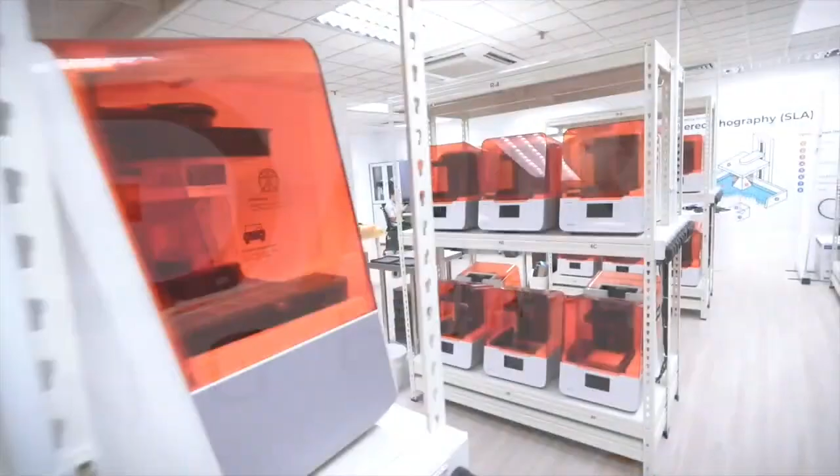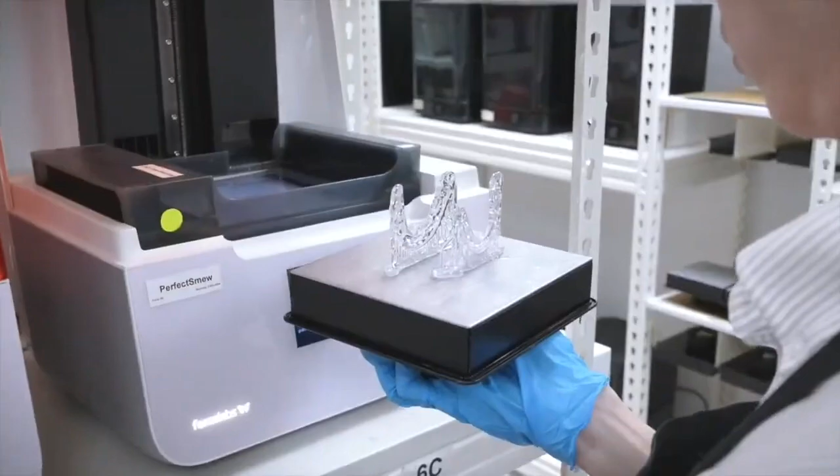In a world where one size rarely fits all, personalized healthcare is not just an option, it's a necessity. At Madarium, we shape the future of healthcare by integrating advanced 3D printing into the solutions we provide. Our technologies empower professionals to offer faster, more accurate treatments, ensuring every solution fits the unique needs of each patient.

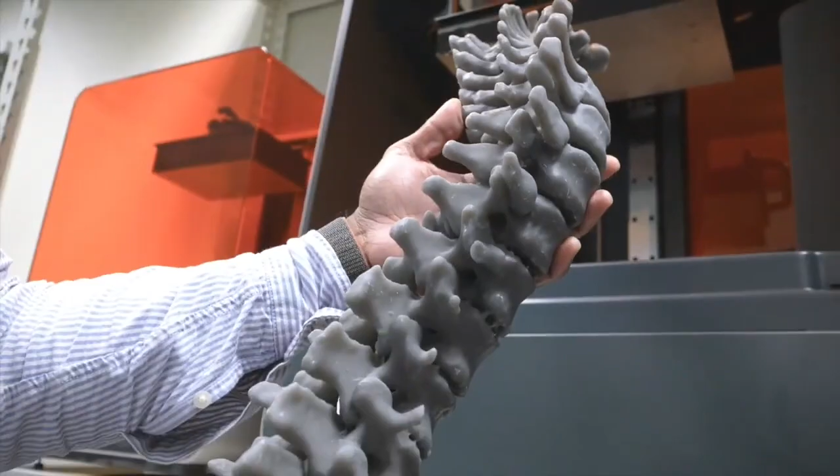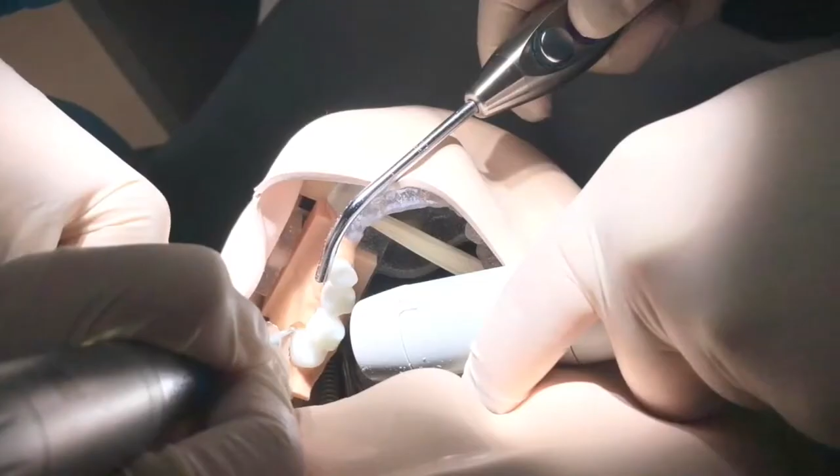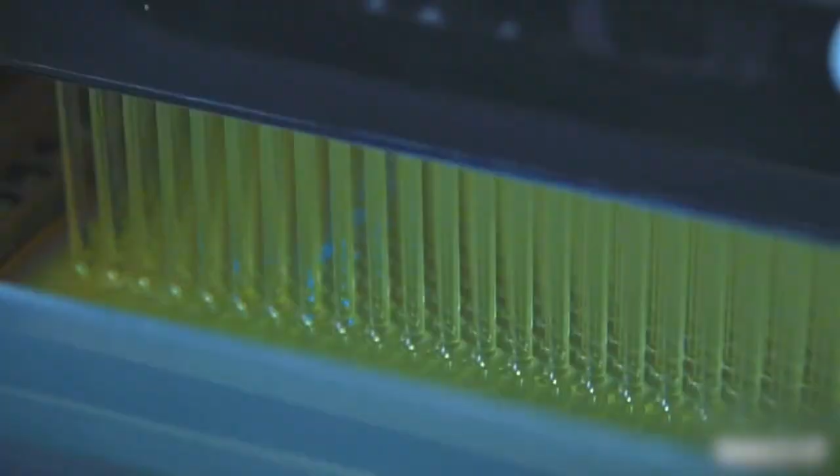We address the unique challenges of the healthcare industry by providing expertise and solutions in customized anatomical models and cutting guides, production of key medical supplies, and enhanced training for healthcare professionals. During the COVID pandemic, we worked with partners and medical practitioners to design, clinically trial, and produce millions of COVID-19 swabs to reduce potential shortages created by the pandemic.

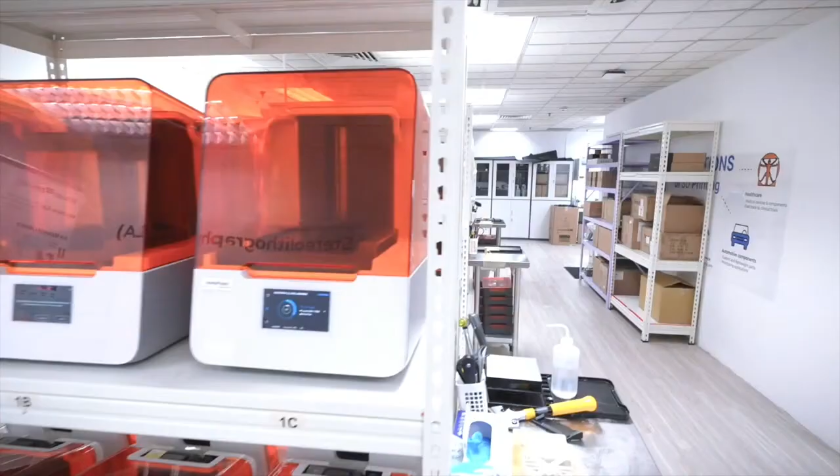Quality is at the heart of everything we do. To ensure we meet the highest requirements of the medical industry, our manufacturing is now certified to the internationally recognized ISO 13485 standard.

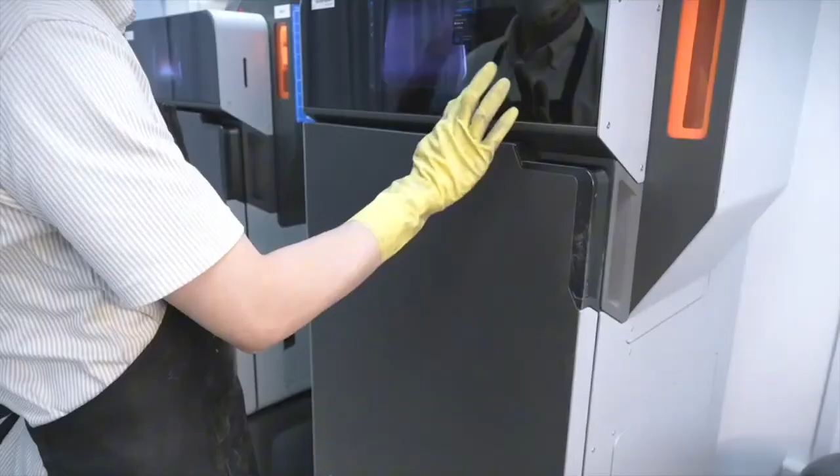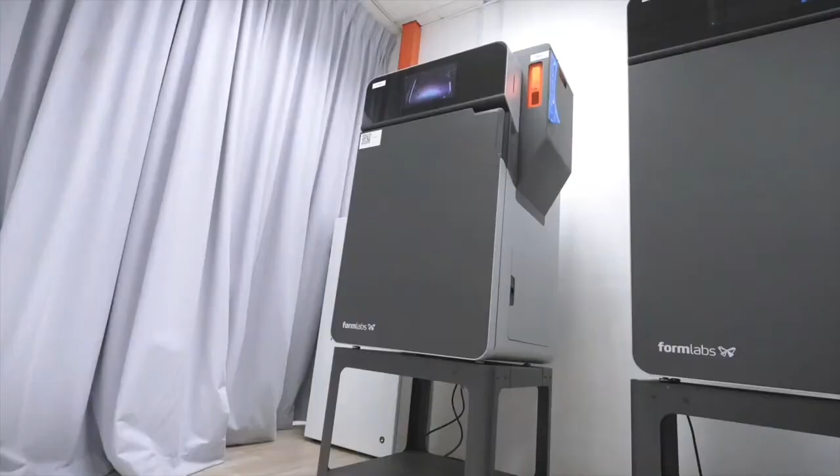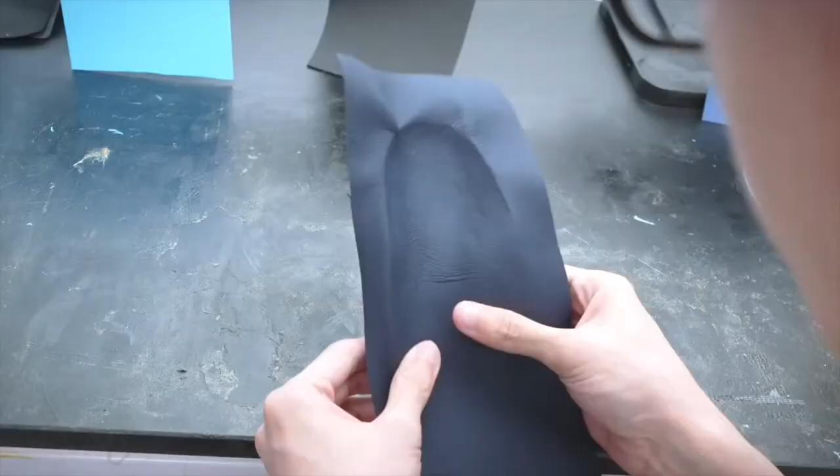This ensures the products we produce are safe, reliable, are of the highest quality, and can be trusted to provide the functionality needed. We have recently embarked on a new chapter to provide the same level of quality and commitment to the orthotics industry. Combining cutting-edge 3D printing technologies like SLS, SLA, and FDM with precise CNC milling, we are now delivering custom insoles from start to finish and working with podiatrists to bring solutions to improve patient care locally and regionally. At Madarium, making a positive impact on people's lives is at the heart of what we do.

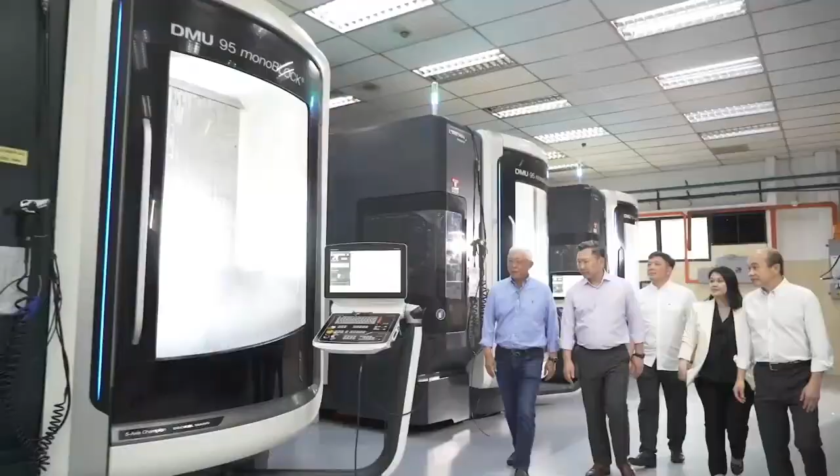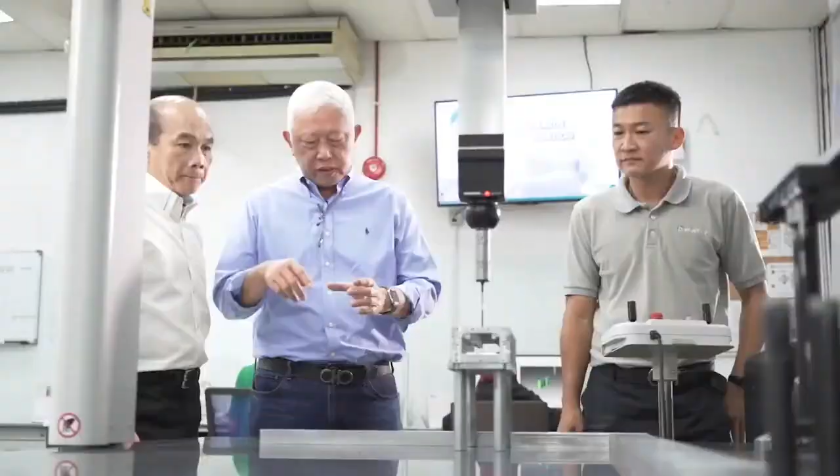We are delighted to sign a Memorandum of Understanding between NAMIC and IngTech. As the national platform for additive manufacturing, NAMIC is excited to enter into a partnership with IngTech. This collaboration will create significant value as we work in partnership to establish an additive manufacturing technology center of excellence in Singapore. Our collaboration aims to develop and customize advanced additive manufacturing training courses, leveraging NAMIC's accredited service providers to ensure the highest quality of education and upskilling.

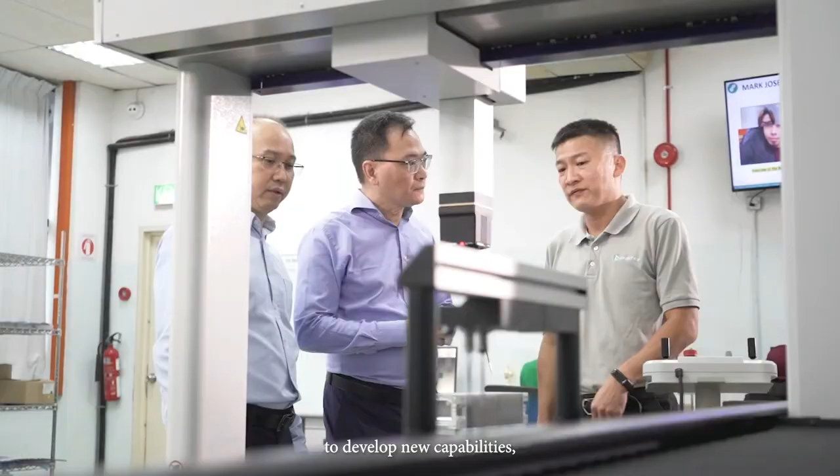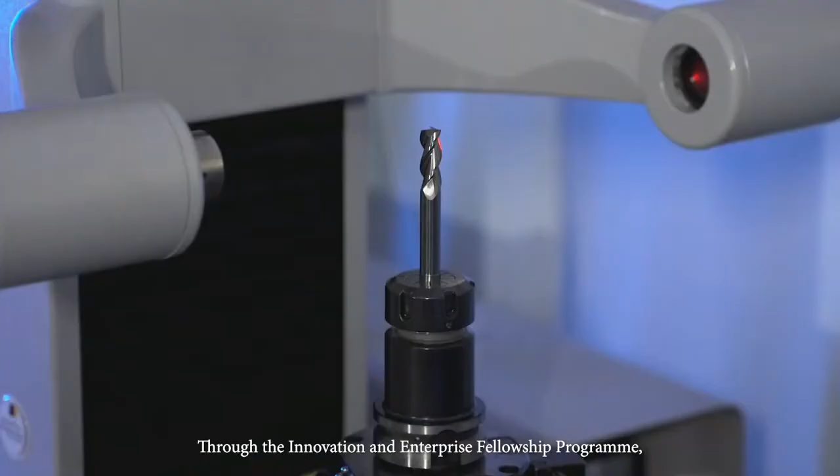We're committed to helping companies develop new capabilities, equip our professionals with industry-relevant skills, and position regional enterprises like IngTech to leverage Singapore's expertise in additive manufacturing. Through the Innovation and Enterprise Fellowship Programme, we will elevate IngTech's technical and operational expertise.

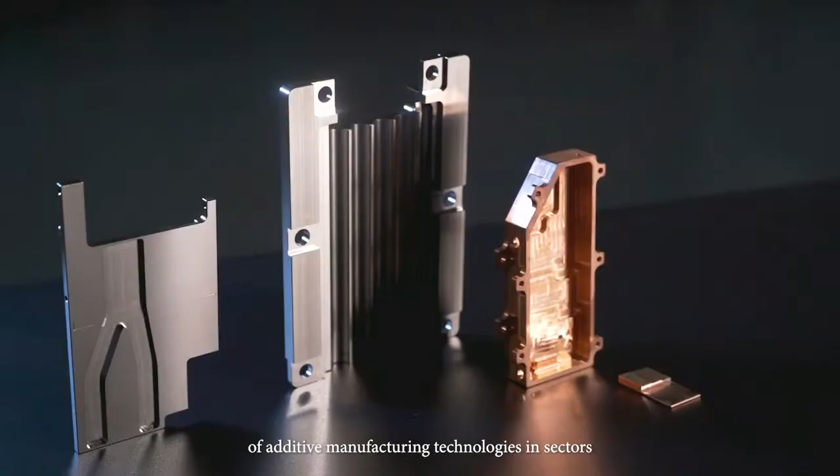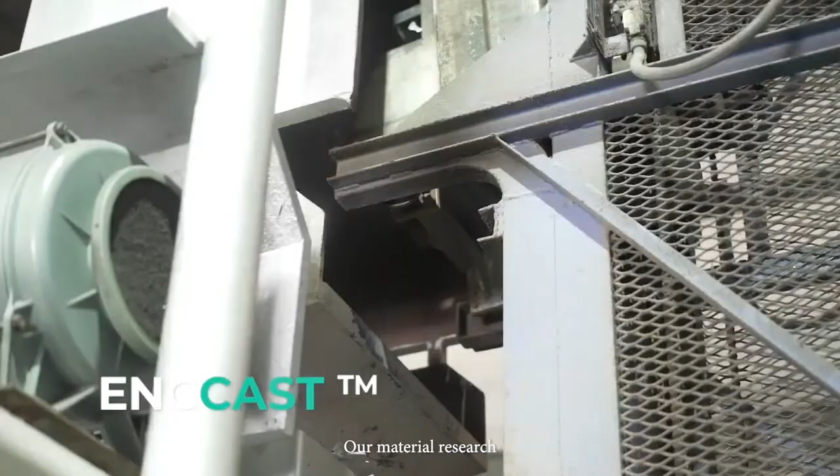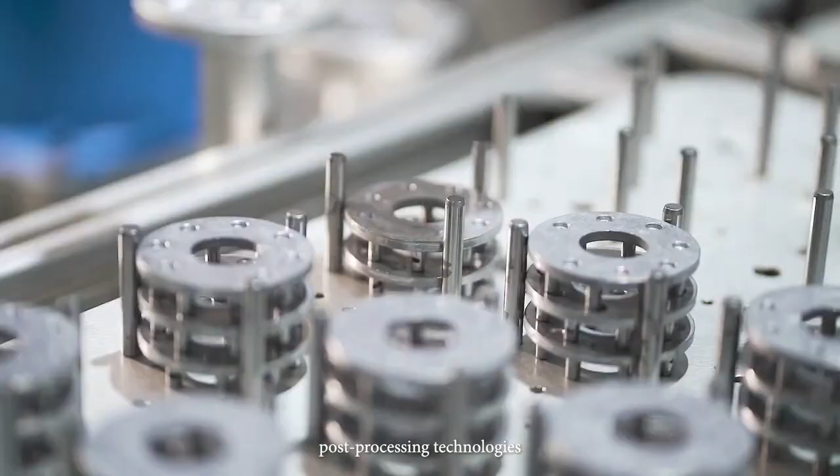We are committed to exploring future industry applications of additive manufacturing technologies in sectors such as automotive, semiconductor, HVAC, and life science equipment. Our material research will focus on optimizing and testing specialized aluminum alloys, while our efforts in process optimization and automation will enhance post-processing technologies, including high-precision machining, coating, and automated assembly.

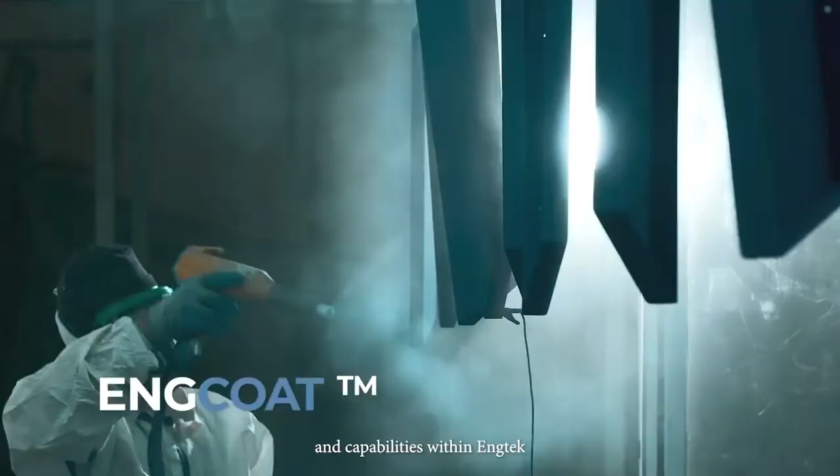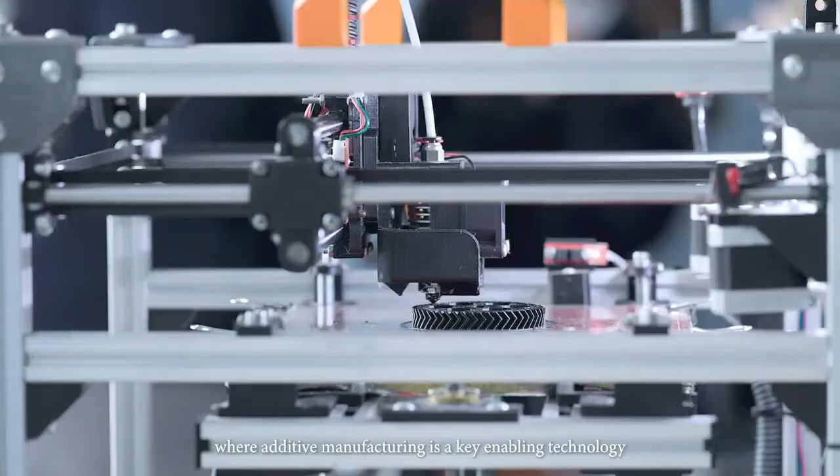We will deploy additive manufacturing machines and capabilities within Engtek to facilitate the commercialization of advanced manufacturing technology in the region. The new Center of Excellence will bring us closer to our vision of establishing Singapore as a deep tech innovation hub where additive manufacturing is a key enabling technology for sustainable manufacturing.

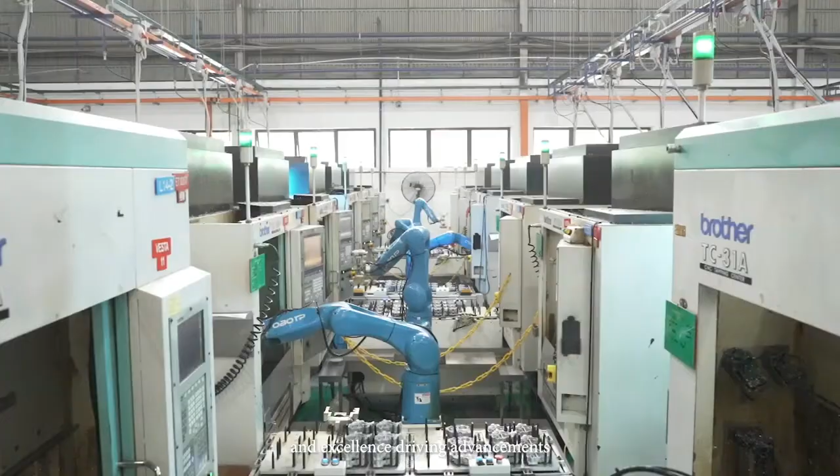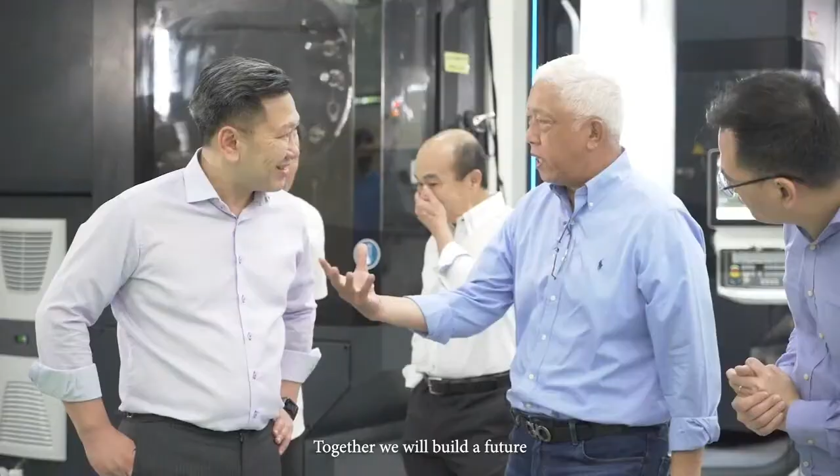We are confident that this center will serve as a beacon of innovation and excellence, driving advancements in additive manufacturing technology across the region. This partnership will drive innovation and support Engtek in expanding our market reach with additive manufacturing. Together, we will build a future where additive manufacturing technology transforms industries and propels us towards a new horizon of success.

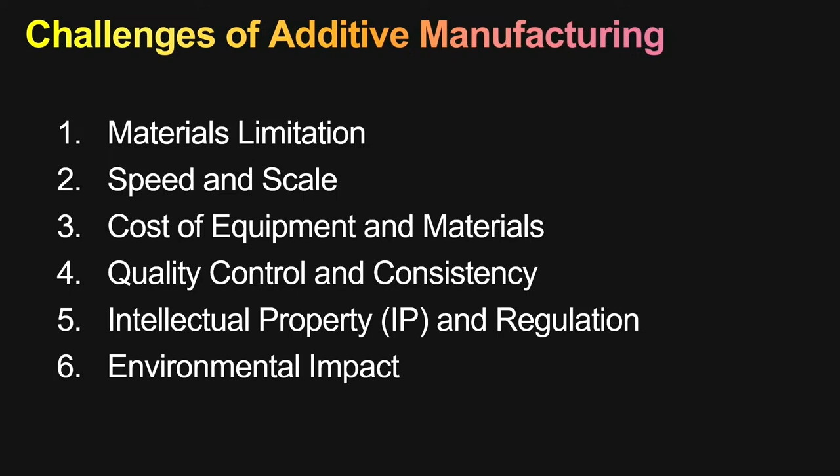So today, despite additive manufacturing being a door opener and making a lot of things possible, there are many limitations and challenges. This is a list of challenges that I felt would be good to share. Of course, this is a non-exhaustive list, and I'm happy to walk through each and every one of these limitations in the next 20 minutes or so.

Let's start with the low-hanging fruit: materials limitation. Plastics and metals are probably the most common materials for 3D printing. Much needs to be done in expanding the choice of materials. Traditional manufacturing can use a broader range of materials like ceramics, composites, and alloys, each with its own distinct properties.

I can tell you for sure, because I come from plastics manufacturing, so we make tools — injection molding tools. Within the tool itself, I can count at least 7 to 8 types of metal materials. Some conduct heat well, some are easy to machine and give the best finishing, and others require a certain level of structural integrity, and so on. But these materials are missing from the equation with respect to additive manufacturing, and this, in a way, limits the traditional manufacturer's choice of materials.

The performance and durability of 3D printed parts don't always match those of conventionally manufactured parts. That's easy to understand, because 3D printing, after all, is a layering process, so you can expect the final printed part to be anisotropic in terms of its physical and mechanical properties.

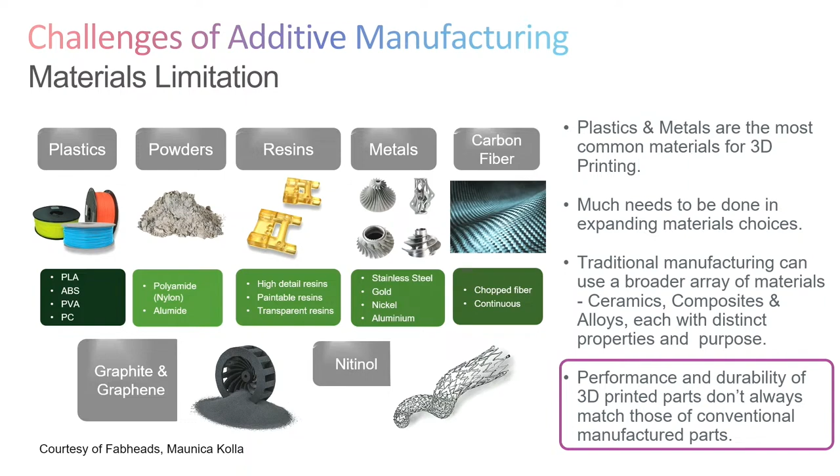The next and most important limitation is speed and scale. Production speed, as we all know, is somewhat limited for now. 3D printing is always viewed as excellent for prototyping and small batch production, but it struggles to compete with traditional manufacturing for large-scale production at a cost-effective price point.

Case in point, if you look at this animation, the traditional method of injection molding could literally use multi-cavity tools from 2 to 4, all the way up to even 32 cavities, versus 3D printing, which is often sequential, piece by piece. Therefore, it is difficult for 3D printing or additive manufacturing to catch up in pace with traditional manufacturing.

Integrating 3D printing into manufacturing production also requires print speed to be improved significantly. For example, if you have a production line where most processes use traditional manufacturing, and you want to introduce 3D printing into any one of these processes, it is quite challenging because you don't want that particular process to slow down the pace of the entire production line.

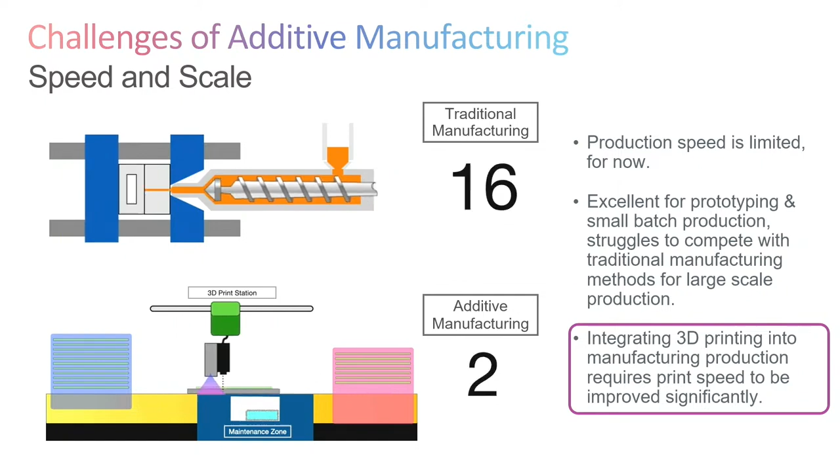Next on the list: cost of equipment and materials. High-end industrial-grade equipment remains prohibitively expensive, especially for small companies like us. Also, specialized materials required for high-performance applications can be costly, and this, in a way, limits the technology's ability and competitiveness with respect to conventional manufacturing.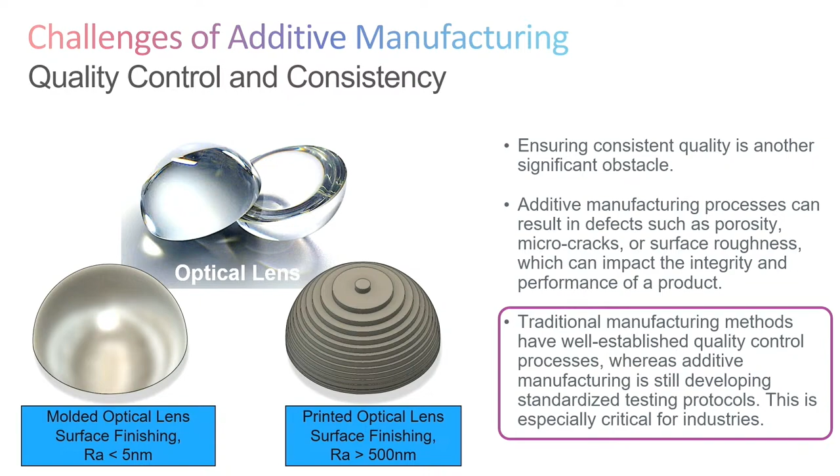Very important: intellectual property and regulation. There is a growing concern about intellectual property theft. Obviously, it is quite easy to copy files and share them. Digital files for 3D printing can be easily shared and modified, leading to unauthorized reproduction or alteration of products.

Regulatory frameworks must keep pace, and this hasn't happened quite yet. But this is very important, and for this sector to take off, this issue has to be resolved, especially for mission-critical sectors like healthcare, aviation, automotive, and so on.

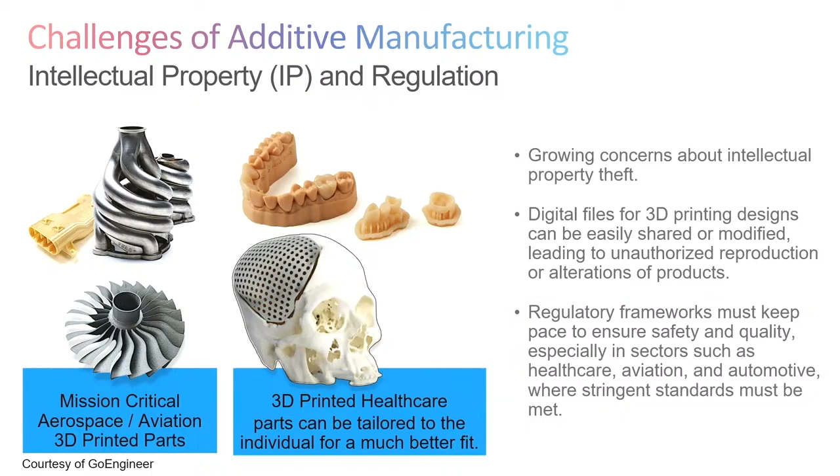Now, this is important enough for me to put on a slide. We all need to know that copyright law protects original work of authorship, and this includes 3D printed objects designed using CAD software. The creator of an original 3D model owns the copyright to the design by default, giving him or her the exclusive rights to reproduce, distribute, and create derivative works from their design. So registering an original design with the Copyright Office strengthens the ability for enforcement.

Now, unauthorized use can come in many ways—for example, selling 3D printed copies without permission, distributing the CAD files so others can print, and making adaptations of the original design to create derivative work. In a nutshell, existing copyright law does provide protection, but one must take proactive measures to assert rights over their intellectual property. So it's up to you to really protect your IPs.

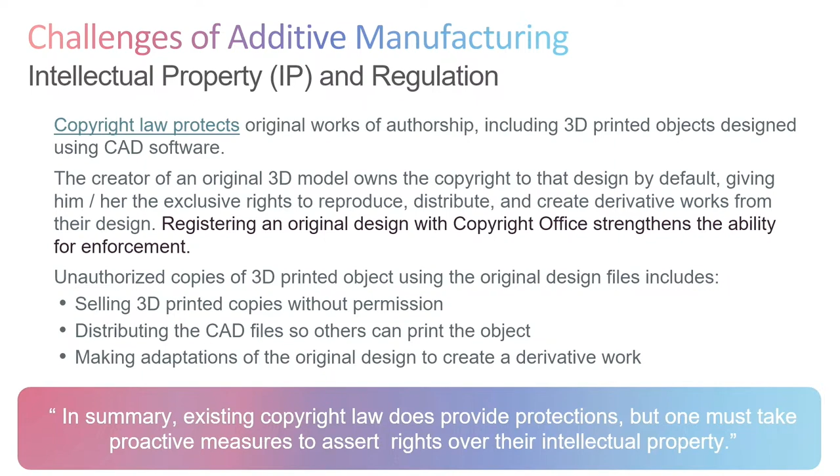What about environmental impact? Although 3D printing has the potential to reduce waste, as you heard from the minister himself, the energy consumption remains very high. And when I say energy consumption, one must understand it is not just the 3D printing process itself—very often the 3D printed product also needs post-processing, like milling, polishing, and so on, and this consumes energy.

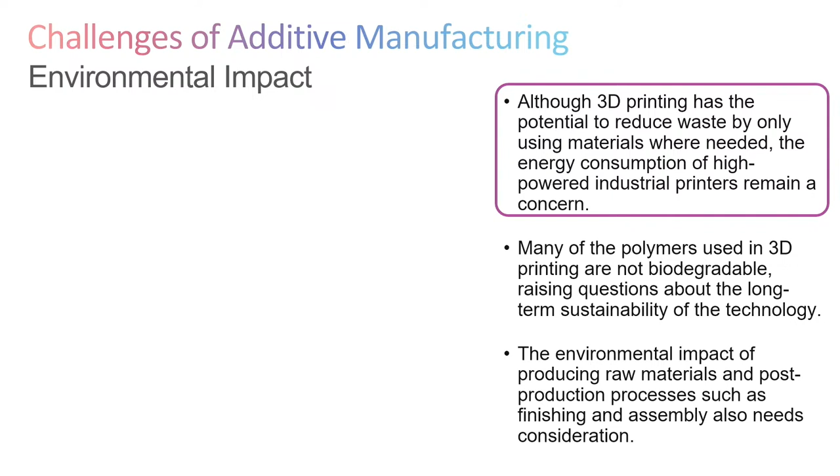Many of the polymers used in 3D printing are also not biodegradable and not reusable, raising questions about their long-term sustainability. In comparison, if you look at traditional methods like injection molding, most of the materials used are thermoplastics, so they can be recycled. For example, the runners can be crushed, defective products can be crushed, and then you can mix them with virgin materials and recycle them.

This is not so much the case with additive printing, because the materials used are mainly UV curable, and therefore they are thermosets—used once and thrown away. The environmental impact of producing raw materials and post-production processes such as finishing and assembly must really be taken into consideration. So it's not just about the printing process; it's also about the finishing processes leading to the final fit-for-use product.

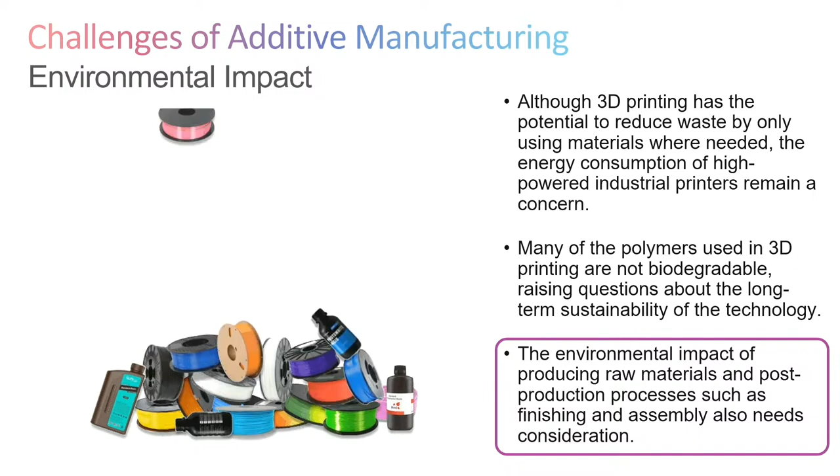All right, now that we have tackled the challenges, it's beginning to feel that 3D printing has a lot of barriers before adoption takes off. But not to be disheartened, I think this is really a very exciting technology that has been embraced and will continue to be embraced, with very exciting future trends in this sector worth a mention.

For example, advances in material science, improvement in print speed and scalability has taken off quite significantly. Customization is also very exciting, especially in the medical space, and on-demand manufacturing where everything can be done within the same location instead of worrying about logistics and supply chain. Using automation and integrating this with AI is also very exciting, because even if everything is printed differently or sequentially, AI and automated vision inspection can help make your product more consistent.

Sustainability and circular economy has advances in this area as well. And of course, very exciting is medical applications and bioprinting, I think this is probably one of the sectors that has really embraced 3D printing. And last but not least, the global supply chain disruption. So I'll take you through one by one.

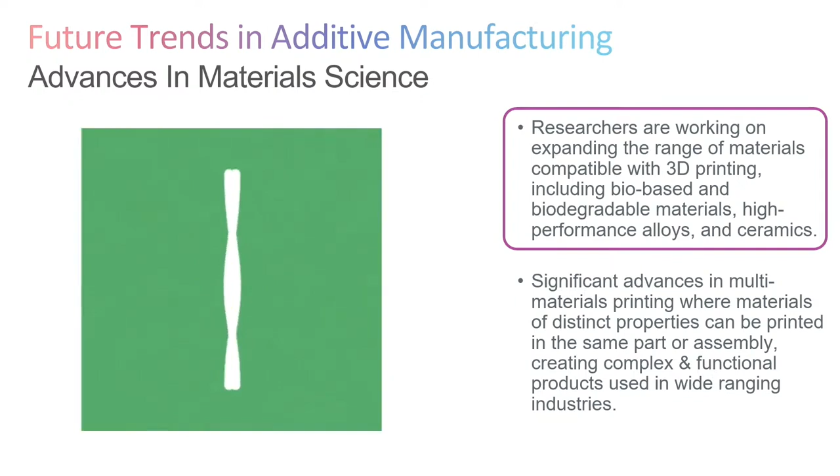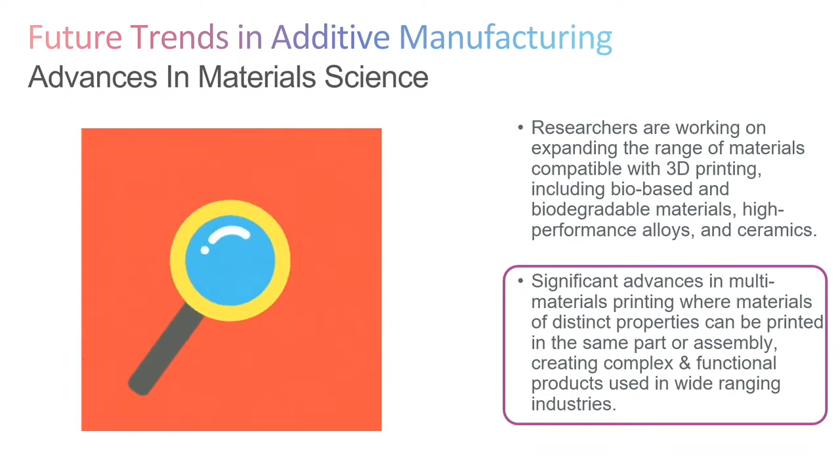Now, researchers are working on expanding the range of materials compatible with 3D printing, including bio-based, biodegradable resins, performance alloys, and so on. There are significant advances in multi-material printing, where materials of distinct properties can be printed in the same part or assembly, creating complex and functional products. A very good example of this is a process called two-photon polymerization.

But two-photon polymerization is not limited to just optics. You can also use it to print, for example, micro needles and stuff like that, which is very challenging for traditional manufacturing to take hold of and produce.

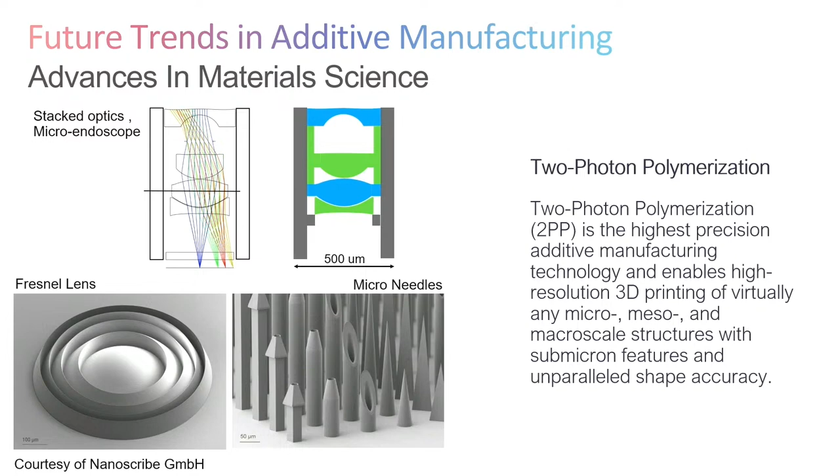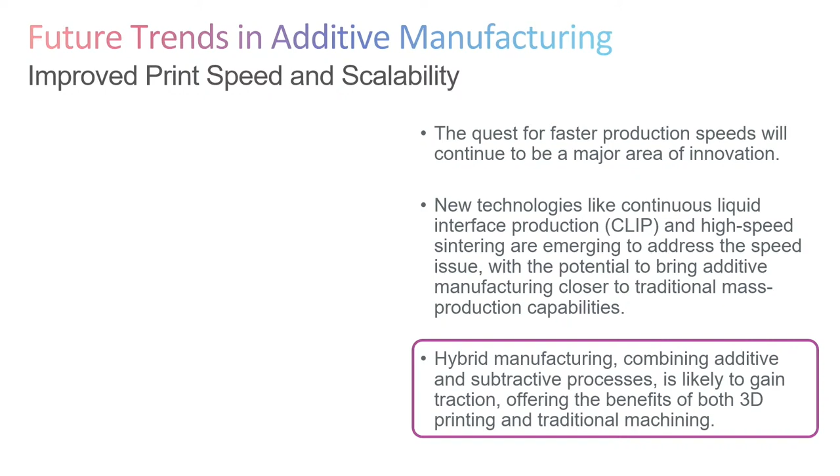None of this is so true as, for example, making an injection tool, and this is something we struggle with every day. In this tool, we have many different components, up to hundreds, using different kinds of materials and alloys. Most of these components are made using traditional processes like CNC milling, EDM, wire cut, lapping machines, and so on. But finally, you need to assemble them together and mount this on a machine for injection molding.

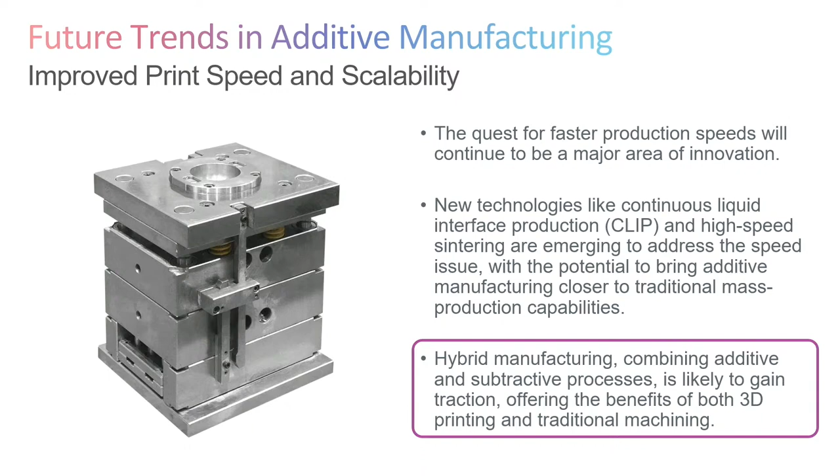But there are pockets of areas where 3D printing can really contribute. To make a tool like this involves making a cooling channel, which is important because you need to cool down the process using a coolant. The traditional method of making this kind of insert is to essentially drill horizontal holes across the metal inserts and plug the junctions where it matters most so that you can form a continuous loop. But this is not an ideal solution because the cooling is forced to move in a very structured way, without being very effective in terms of the cooling.

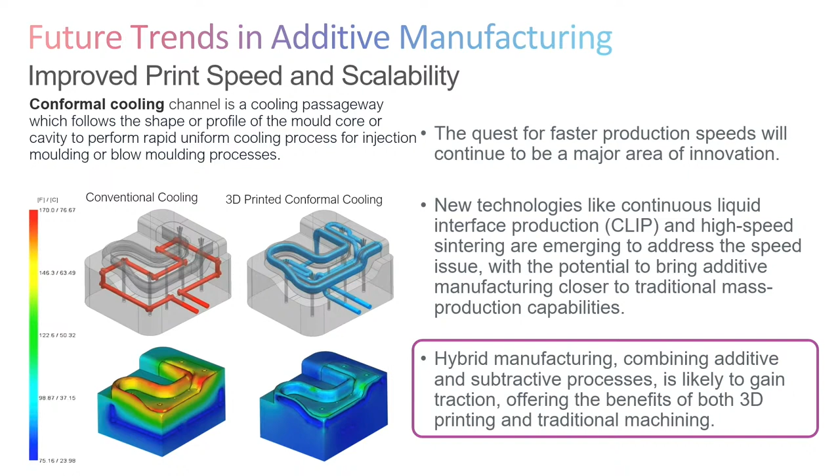Now, this can be replaced with what we call 3D printed conformal cooling, where the cooling channels are printed in such a way that it conforms to the geometry of the insert. This allows for more optimized cooling, as you can see from these thermograms. So this is one example of how hybrid manufacturing can combine additive and subtractive manufacturing to make sense of the manufacturing and offer a better solution to our customers.

Taking you down memory lane. This is the first 3D printed part produced by Mr. Chuck Hull in 1983, made using a prototype printer that he developed himself. You can see this on the right-hand side. This piece, measuring slightly more than an inch, took a few months to take shape.

You may laugh at this now, but today this same part can be produced within 10 minutes with better finishing and structural integrity. So this goes to show that 3D printing has really come a long way.

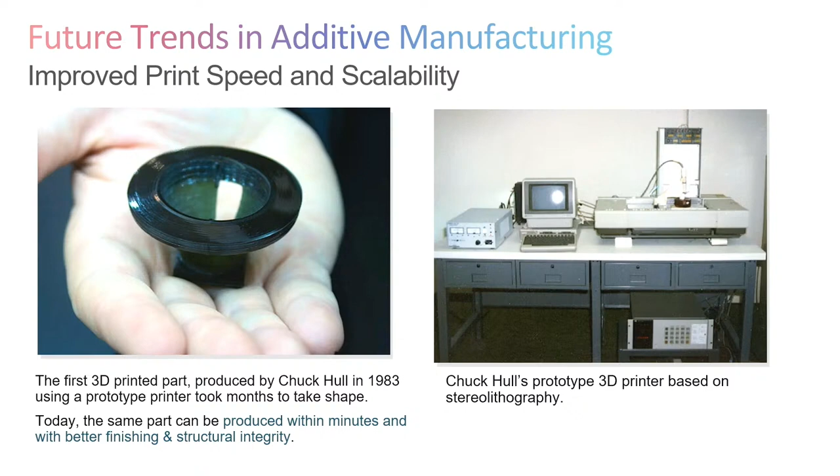Customizable and on-demand manufacturing. Additive manufacturing is well positioned to lead a shift towards greater customization, as you can see from the earlier presentation. This is none more obvious than in medical applications. Products can be tailored to specific needs of individuals or businesses, whether that's a medical implant, personalized consumer products, or spare parts made on demand.

Some examples here would be 3D printed orthotics, or even printed frames for your spectacles and eyeglasses. This is real because Hoya, the famous Japanese optics company, has actually launched a vending machine that prints precisely what is shown here, a frame suited to your face shape, your geometry, and so on. It showcases the customization of 3D printing and the advantages that it brings forth.

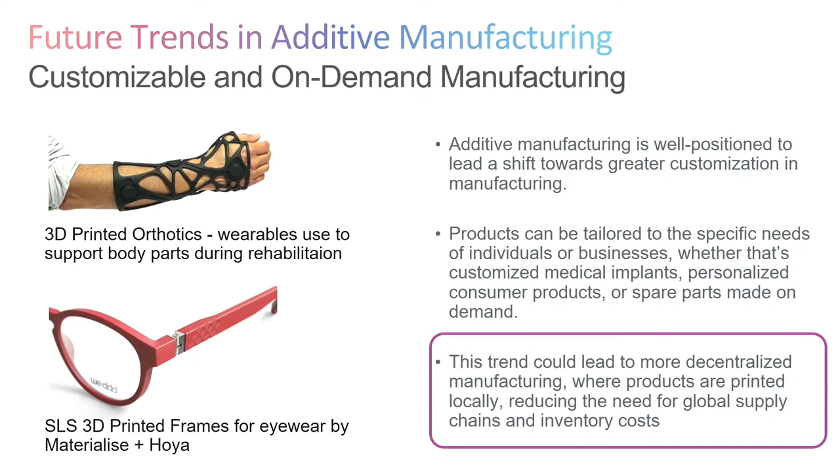This trend could also lead to decentralized manufacturing, where products are printed locally, reducing the need for global supply chain and, of course, inventory cost.

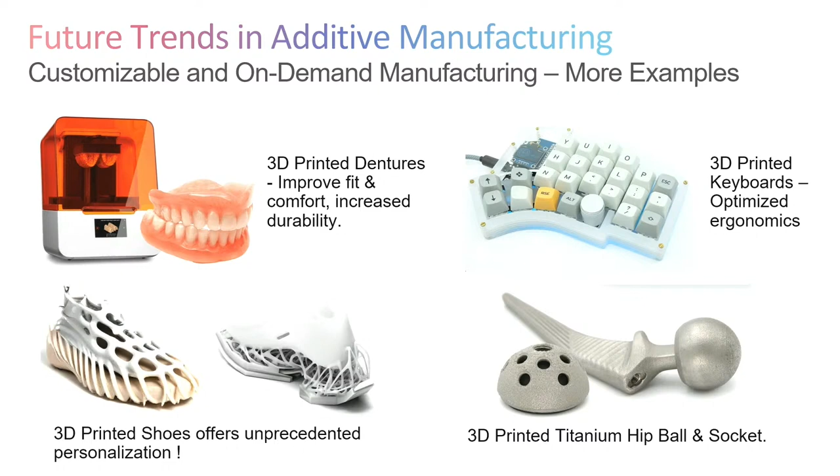Here are more examples of suitable products that would take advantage of 3D printing, from dentures to shoes to keyboards with optimized ergonomics, and 3D printed titanium hips and sockets.

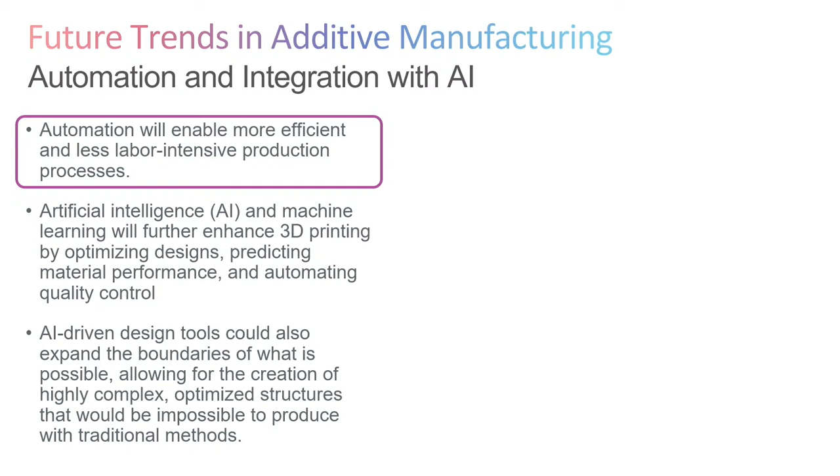Automation, also mentioned by the ministers, and how we can integrate AI into the equation. Automation will enable more efficient and less labor-intensive production. Artificial intelligence and machine learning will further enhance 3D printing by optimizing designs, predicting material performance, and automating quality control. I want to point you to this animation here.

This is an actual product or printer that we are developing. On the left-hand side is a magazine that's loaded with injection molded panels. What the printer does is print another layer of light blocking ink on one of the slopes.

There's a camera staring down at the printing. Because this is done with inkjet printing, nozzles get clogged from time to time, and when that happens, the part quality varies. So what the AI does here is look at a part and determine where the printing is not up to mark because some nozzles are clogged, and it alters the algorithm by switching to other nozzles that were not clogged.

By doing so, we could actually infuse AI into making the process more productive and the quality more consistent. I think this is an example of how we can use AI or machine learning, whichever way you want to call it, to help create processes which are more reliable.

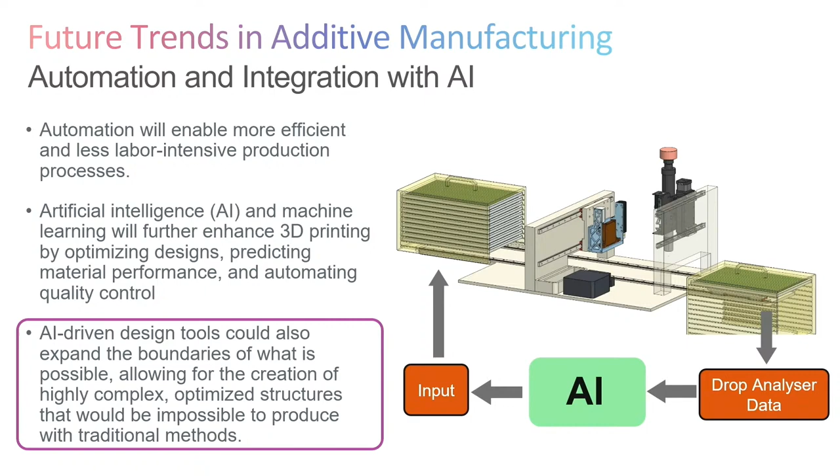So AI-driven design tools like this could expand the boundaries of what is possible, allowing for the creation of highly complex, optimized structures that would be impossible to produce with traditional methods. Let me show you the real product.

This is the panel that I spoke about, a prototype version. Unfortunately the video is not playing, but that's fine. What you can see here is a panel that we molded, but only on one side of the Fresnel—this is made by Fresnel. Only on one side of the Fresnel is printed with a dark ink that blocks the light. And why is this important?

Because this panel is used for holographic projection. At certain sites, on one side, you do not want the glare of the sun to be transferred to the eye, rendering the vision of the holograms more challenging. So this is exactly what an AI-enabled 3D printer would be able to achieve.

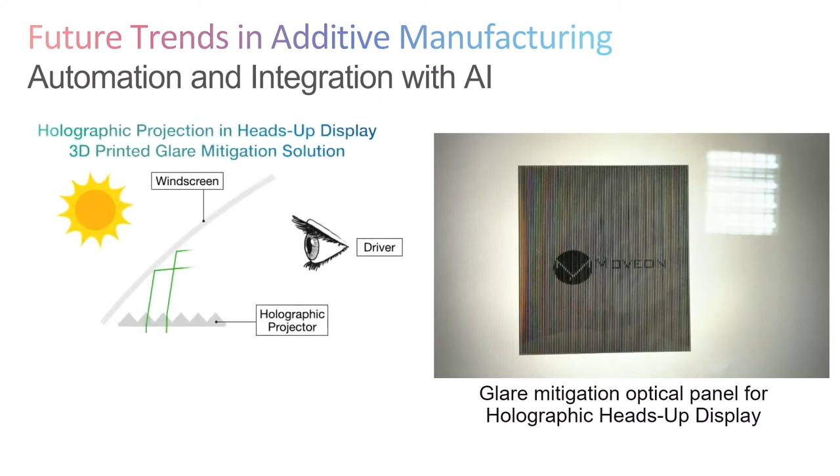Sustainability and circular economy. As the global focus on sustainability intensifies, additive manufacturing has the potential to contribute to a more circular economy. It's good news that researchers are now exploring ways to recycle 3D printed products and reduce energy consumption during the printing process. This is very important because if you continue to generate waste that cannot be recycled or reused, then this technology is not going to be very good for our environment.

Additionally, new materials like biopolymers and biocomposites could help reduce the environmental footprint of 3D printing. Hopefully more work gets done in this area and the world can be a little bit more sustainable as we embrace additive manufacturing.

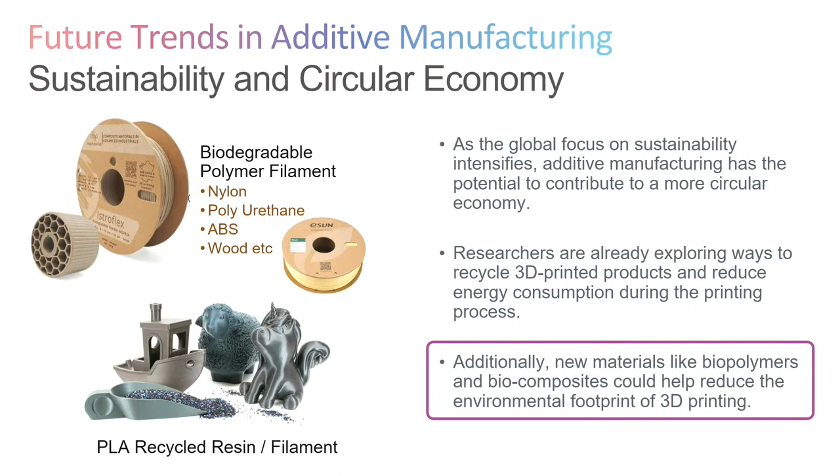Medical applications and bioprinting, this is probably one of the very exciting areas. In the healthcare field, additive manufacturing is poised to make revolutionary advances. I've spoken about this earlier, customized prosthetics, dental implants, bioprinting of tissues. It's all been developed on the horizon. Bioprinting will one day, hopefully, give rise to living tissue printing, potentially the printing of even functional organs.

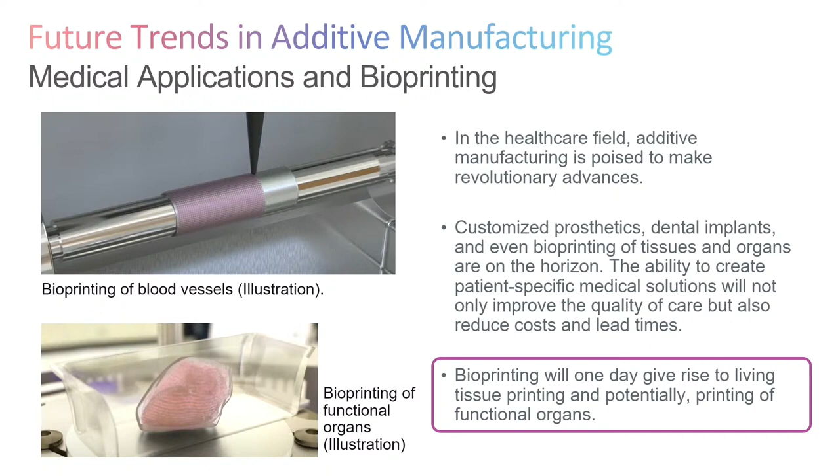And of course, global supply chain, right? Additive manufacturing will enable localized production, thereby reducing the need for large-scale shipping and storage of products. And if you look at this animation, it really takes a lot of work to see how parts can be shipped or transferred from point A to point B. There's really a lot of work, right?

And if we could do away with this through 3D printing, it saves on a lot of time, resources, and of course money. So hopefully companies can adopt a print-on-demand model, allowing them to produce goods as they are needed. So it's like a JIT kind of arrangement. And obviously this could significantly reduce the lead time and transportation cost. And we see how important this is during the COVID days, where the entire supply chain was kind of disrupted.

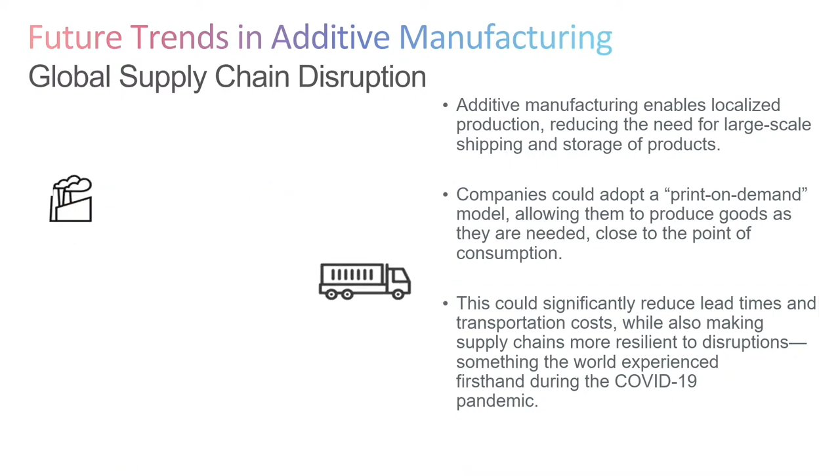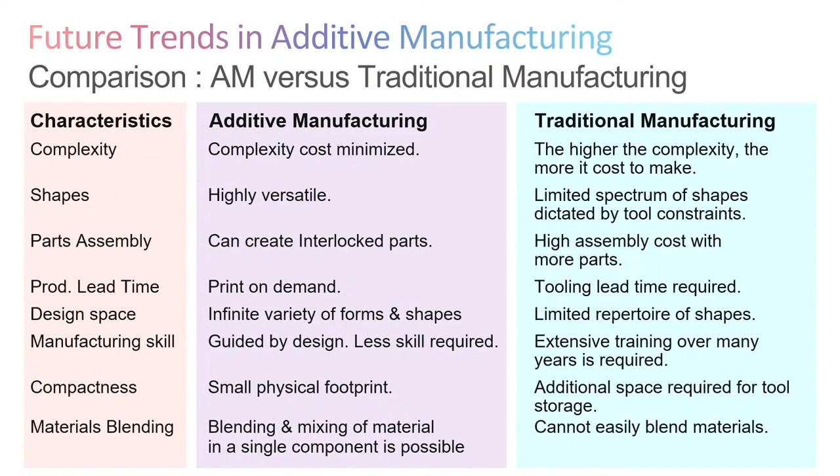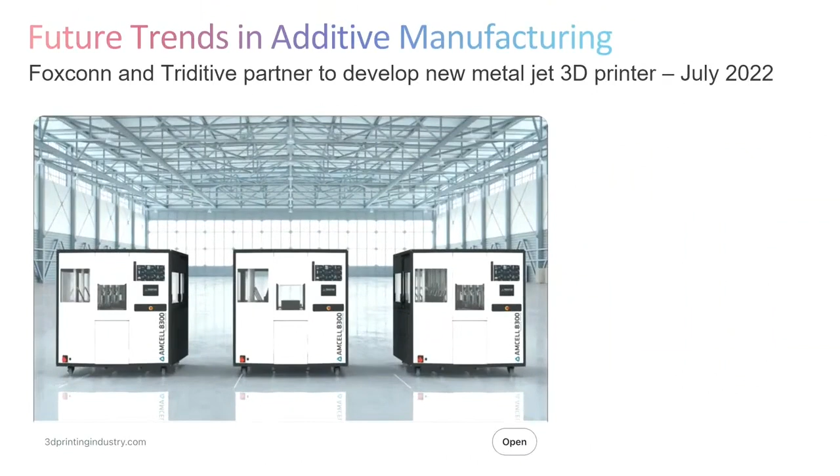I would like to come back to this statement made by Terry Gou: it is a gimmick, and this statement was made in 2013. Fast forward to today: Foxconn and Triditive partner to develop new metal jet 3D printer. This was announced in 2022. And it goes to show how much 3D printing has advanced, to the point that it can change the skeptic's mind. And this is good news for the 3D printing industry, for Foxconn, a large traditional manufacturer, to embrace this.

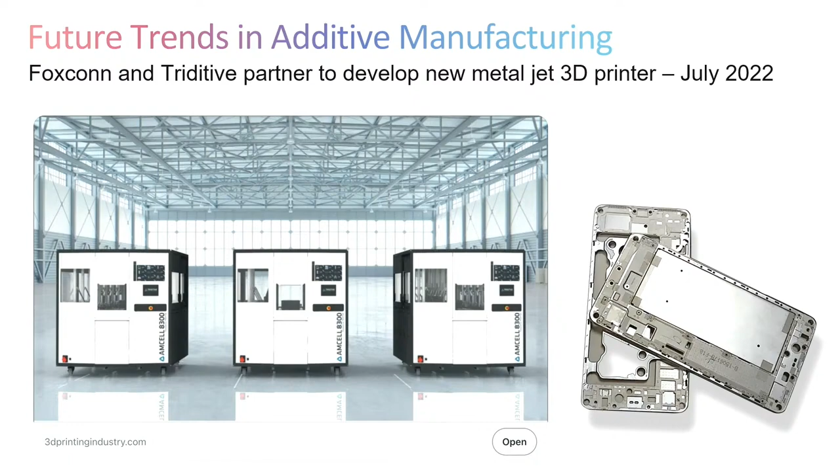In closing, the challenges of additive manufacturing are not insignificant. Material limitations, production speed, cost, regulatory issues present hurdles to be overcome. However, the future trends in this field are incredibly promising. I think every one of us in this room recognizes that. Otherwise, we wouldn't be here.

Advances in material science, the integration of AI and automation, sustainable practices, and the expanding medical applications of 3D printing are just a few of the factors that will drive this industry forward. Not just the medical industry, but a lot more other industries, right? Even for us, an optics company, where it is traditionally very difficult to make optics through 3D printing, we are also pioneering in that space. Unfortunately, that's for another day.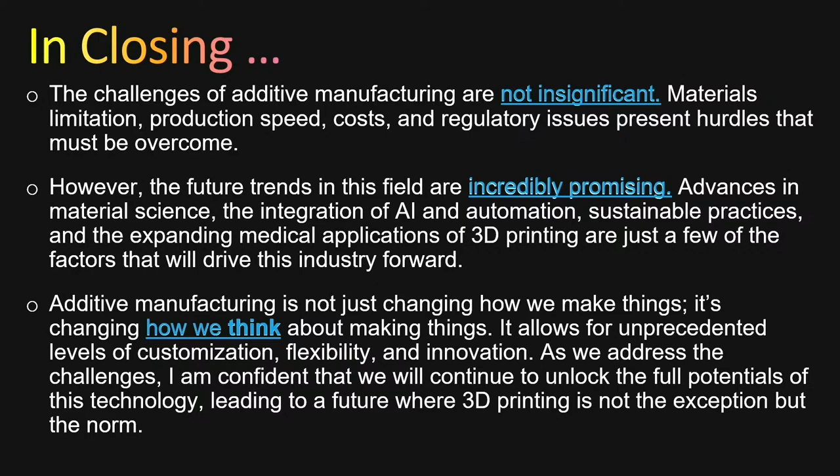Additive manufacturing is not just changing how we make things, it's changing how we think about making things. So before we even start planning and embarking on the manufacturing, we have to think, we have to plan, we have to figure out the best way, the most cost-effective approach to getting the products made. As we address the challenges, I'm confident that we will continue to unlock the full potential of this technology, leading to a future where 3D printing is not the exception, but the norm.

Last but not least, I would like to invite all innovators to make my dream machine. Hopefully one that can print different kinds of traditional heritage food, I call it. Thank you very much for your attention. Thank you, Teck Lee. Thank you.